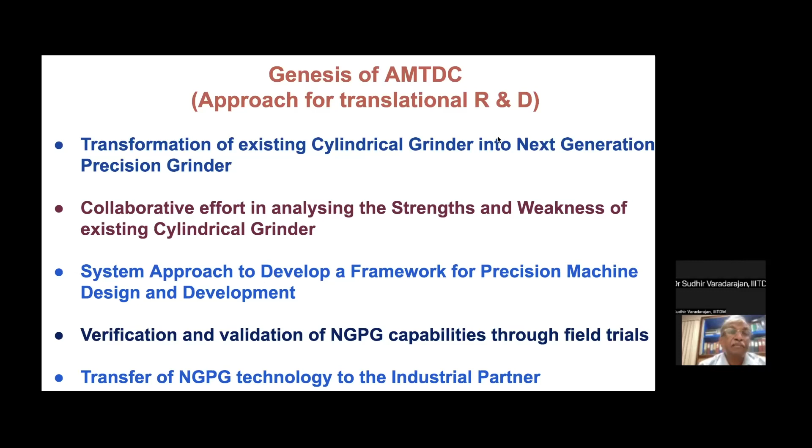We wanted to make this machine on par with the machines being imported by many industries, and here I used the collaborative effort. The first thing was that we felt we needed to understand the strengths and weaknesses of our Indian machine tool manufacturers, and then we used the system approach.

Many people from outside, from Saint-Gobain and other places, used to advise me on how I should develop this framework, and that's where we used the system approach. We also built the system with the help of industry and validated it with real-time activities which happen in the industry.

There were several collaborators who supported me in providing the tooling, fixtures and components. After validating it for almost a year and a half, we transferred this technology.

I think this is the basis for me to get into the Center of Excellence on Machine Tools and Production Technology.

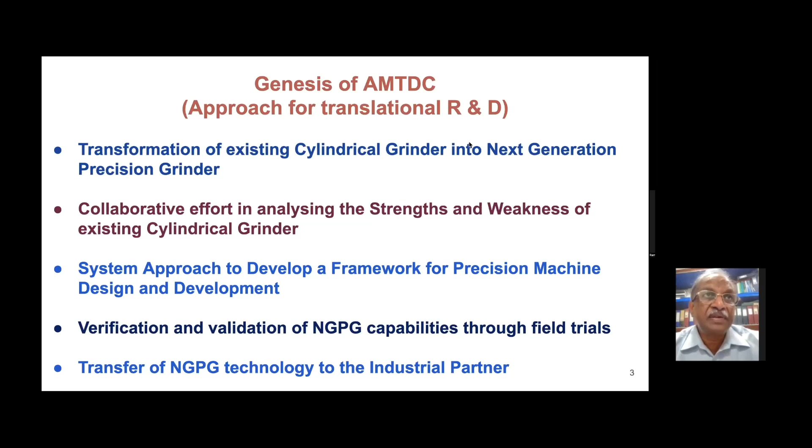I'll spend some time here, but later on I can quickly run through some of them to show how we used to get these projects from industry as well as government support.

When this project was sanctioned by the Principal Scientific Advisor's Office, it was pre-competitive R&D. They were not expecting much, but they wanted to focus on enhancing the capabilities of the Indian machine tool sector.

That's when we approached industry like Micromatic Grinding, then we went to associations like the Indian Machine Tool Manufacturers Association. Through the manufacturer of the machine tools, we approached the end users of the machine tools like Delphi TVS, and then testing facilities available at CMTI in Bangalore, AMTTF.

And then a gentleman from Saint-Gobain Northborough, who was supplying grinding wheels and dressing tools etc. He graduated from MIT, and was the director of surface preparation technologies at Saint-Gobain Northborough. He also helped us in showcasing the system approach and building the entire framework.

I think the challenge for many machine tool industries in India is high productivity machines and high precision machines. That's when we felt we needed to make a survey of the machines being developed by Indian machine tool industries, identify the specifications for which we have to put our money, effort, and collaboration activities.

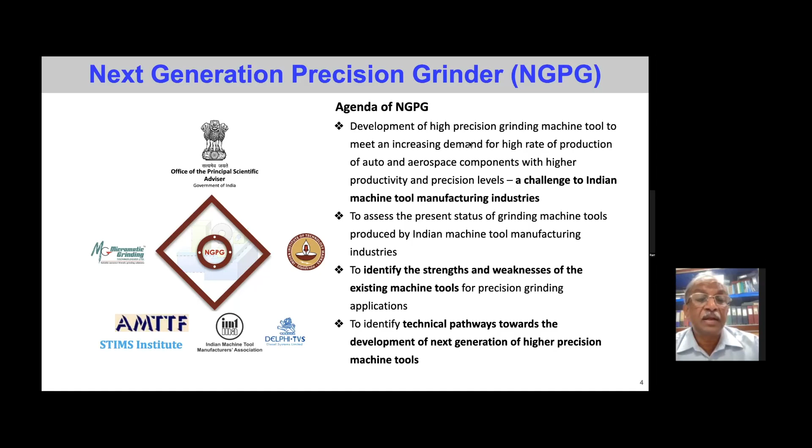That's where I'm just spending a couple of minutes on how this framework was developed. So first we went to end users like Delphi TVS and asked them, and many machine tool manufacturers using high precision grinders like textile and hydraulic component manufacturers. They all said that the tolerances and specifications of machines that we use are very high precision machines.

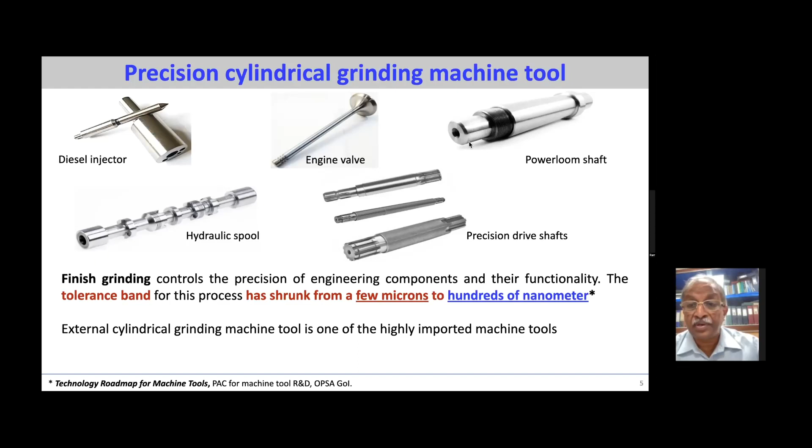There was a roadmap brought out by the Principal Scientific Advisor's Office in order to develop next generation machines in India, for which the government wanted to support through both collaboration efforts and funding. So when we surveyed the components, we found that Delphi TVS is using high precision grinders which are imported for making all the types of components shown in this diagram.

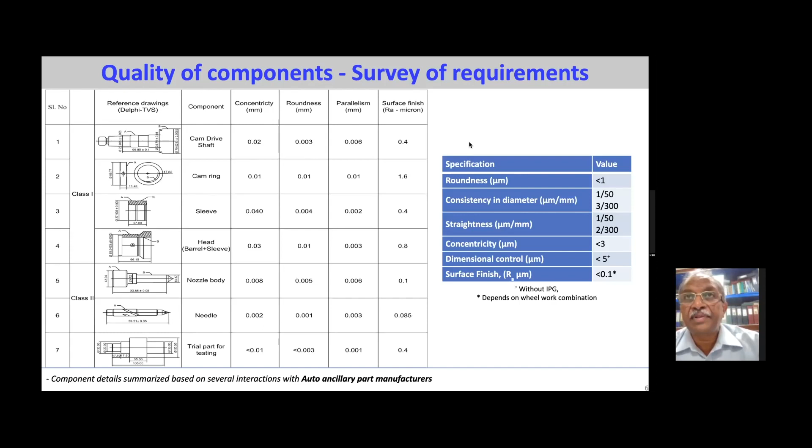We identified the features in terms of concentricity, roundness, parallelism, and finish, etc. We felt that a machine we wanted to develop should have certain specifications, and we should bring out that machine so we can compete with the outside machines being imported. This is all without any gauging, without sensors and adaptive control. That is what we identified.

We formed teams from both sides, ranging from top executives and top-level management to mid-level and lower-level management. All of them understood why we were developing it. Myself and a couple of engineers recruited for the project, along with young students, all worked together. About 20 people worked from our side and about 20 from the other side. There were several reviewers who constantly reviewed this project at a frequency of about 3 months.

Then we brought out this framework following systems thinking and a systems approach, wherein the overall system's performance can be enhanced only when we look at all of them. So that is where we looked at the machine process and the interaction of the tool with the workpiece.

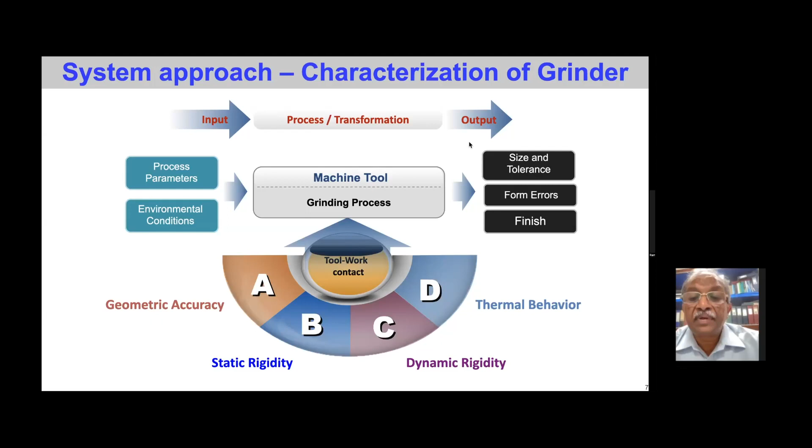We formulated several models through data collected from the machine and also by benchmarking it with the imported machine, identifying weaknesses and stating that these weaknesses have to be removed if you want to make the machine better. You can see the entire engineering concepts, from geometric measurements, kinematic measurements, volumetric accuracy, to looking at the static and dynamic aspects of the machine in terms of its rigidity and performance. Of course, the thermal behavior of the machine is also important if you want to realize precision grinding with these machines.

It took almost 2-3 years for us to bring out this framework and then file a patent. At the same time, the industry also understood where they had to put in their efforts to make changes and modifications in various units.

We also identified the errors that arise due to certain aspects, and most of these errors are due to thermal errors. We did some experimentation and also proved that if you correct these errors, the machine is likely to become a precision machine.

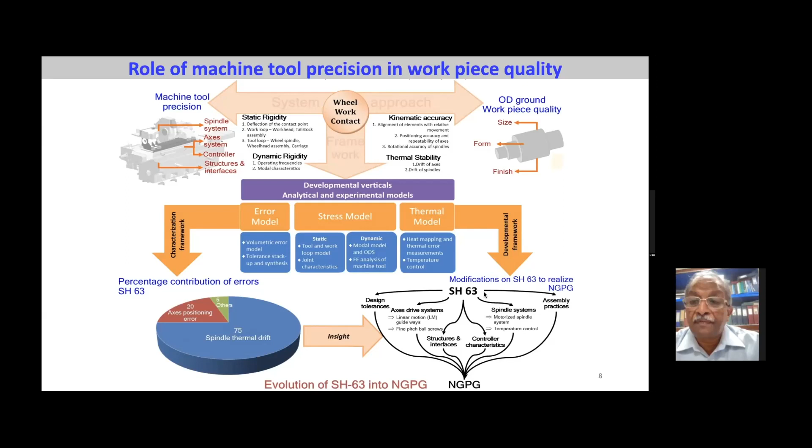So what we took was a machine with some specifications, the SH63, having much lower precision levels, and by changing the design, assigning tolerances, changing some of the drive systems, and carrying out corrections on the drive systems and spindle cooling, etc., we were able to bring out this machine with the support of the industry, and we named it the next generation precision grinder.

This was inaugurated by Dr. Chidambaram, because the office of PSA was supporting this under pre-competitive R&D, and it was installed at IIT Madras in June. But then the story did not end with this.

Now it has begun. Like they said, who will buy this machine? How do you sell this machine? Unless you prove it to the customers, they are not going to believe that this machine is going to give the precision levels that you are projecting.

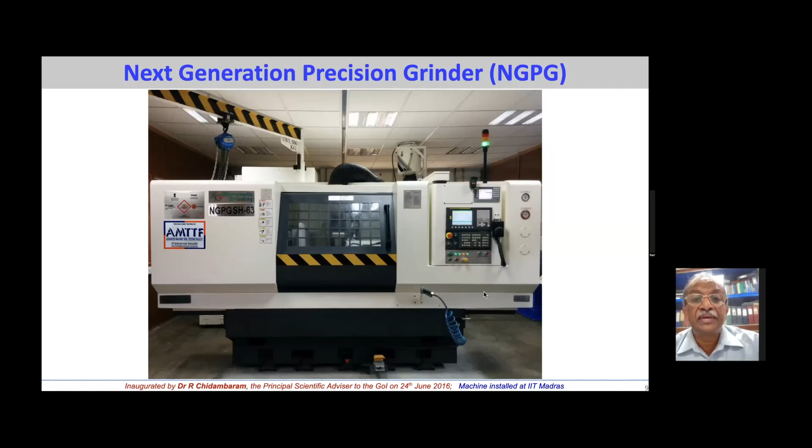So then we approached different companies like Bosch, Delphi TVS, Danfoss, and asked them to please provide us the tooling and also the workpieces so that we could machine them - not just one or two, but hundreds and thousands. Finally we brought out this entire capability chart, and that's when they believed it, and then we transferred the technology.

So what I'm showcasing is an example of how the capabilities of a machine tool industry producing machines at a lower precision has been taken to the next level. I think this company is still with us, supporting many activities and taking up many other projects with funding from both the government and their own contributions.

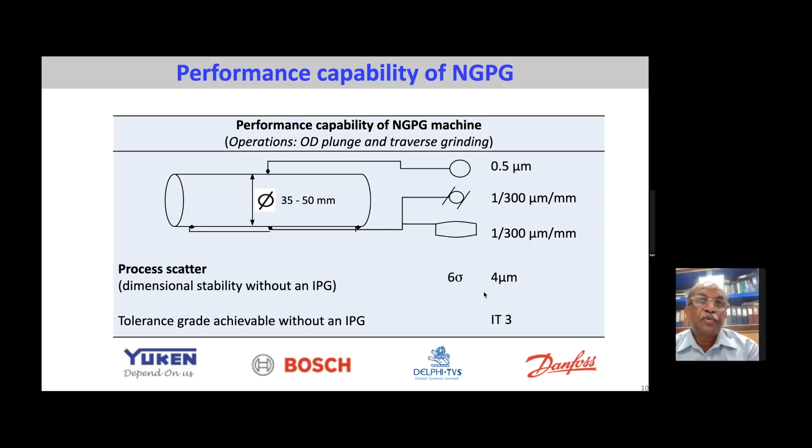During this time, the PSA's office, Ministry of Heavy Industries and many other ministries formulated a policy, and that policy is approved as the Capital Goods Scheme. This is basically to enhance the competitiveness of the capital goods sector.

In phase one, they said we will support different activities ranging from technology development, skill development, Samarth Udyog, and facilities, etc. But at IIT Madras, we consciously decided that we will not get into the other activities such as facility centers, Samarth Udyog, and testing and certification centers. We have stayed focused on technology development.

We also wanted to build an innovation platform to connect people, mostly a digital platform. We also offer a lot of internships for students from different colleges, not only from IITs and NITs. And we take the technologies developed here to the next level through partnership mode, which we call an industry accelerator.

So what I'm going to show you in the next 15 minutes is a snapshot of how we have gone about taking up projects, from many industries, north, south, anywhere, you can see.

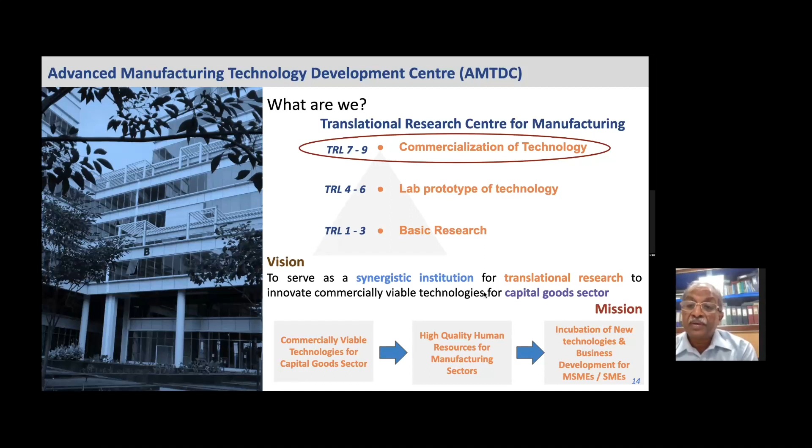Many of them, if enthusiastic and interested, we also encourage them to incubate their ideas with a small amount of money. And then they also go to the next level of a startup, and some of them are growing in other areas of manufacturing.

So overall, this center doesn't work on one or two technologies. Manufacturing basically covers many areas. First we started with only the machine tools and various technologies needed to make machines better, either high precision, high speed, or highly reliable machines.

We have worked to build several robots and also create automation solutions for MSMEs. And the last but not least is digital and smart manufacturing, wherein MSMEs can move from one level of automation to the next, where digital transformation and digital manufacturing is one of the key areas they should clearly understand.

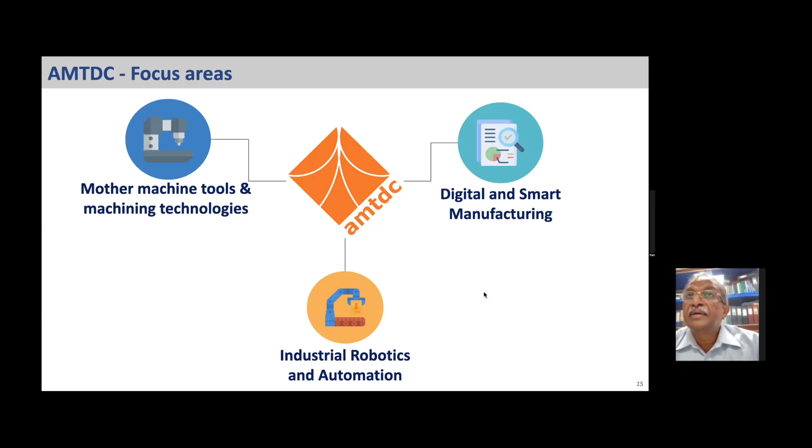Then only they can move from automation level 3 to automation level 4, where smart manufacturing can really create a change in the entire system.

As I said earlier, I explained how we approach the problem. We go to industry based on their interests and support, both technological and financial support are needed, and they commit. Then we identify the technologies which can be proposed as future or important technologies for each industry. You can see these technologies as prototypes and then finally as machines, sold by each company not only in India but outside the country too. Some have tie-ups with other countries, but when they get this transfer of technology, there are gaps they could not solve, and that's where our center and team help them.

These are projects ranging from simple cut-off machines to prepare metallurgical specimens, where efficiency and quality of cut are important. That's how we got into orbital cut-off machines, direct drive machines, and automating the entire line for grinding, polishing, etc. The other one I showed is the high precision cylindrical grinder.

We are using it to collect data and diagnose the entire machine tool, then create an automated system for arriving at cycles, automated dressing, and downtime monitoring, all on the same machine.

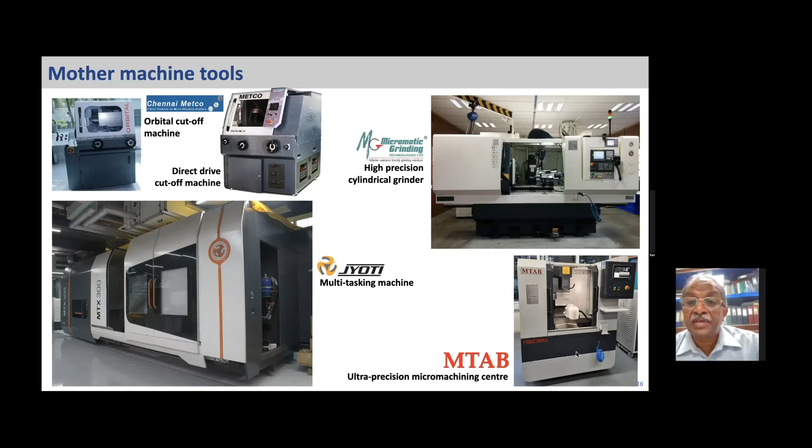Similarly, there are certain technologies that are completely denied, and we have to take them as a package and use them. These are some innovative ways of solving the problem. We looked at patents, including expired patents, studied all of them, and came up with several designs. We created test rigs, implemented them, and tested them with a third party.

These are some of the units that go into hydrostatic systems, which can be used in most high precision machines for grinding or positioning. These are patented, not only Indian patents but also outside patents we filed, and some were already approved.

Using this capability set, we have also expanded our domain with expertise in different areas like manufacturing processes, water jet technology, and suspension jet technology, and we supplied these to different defense industries.

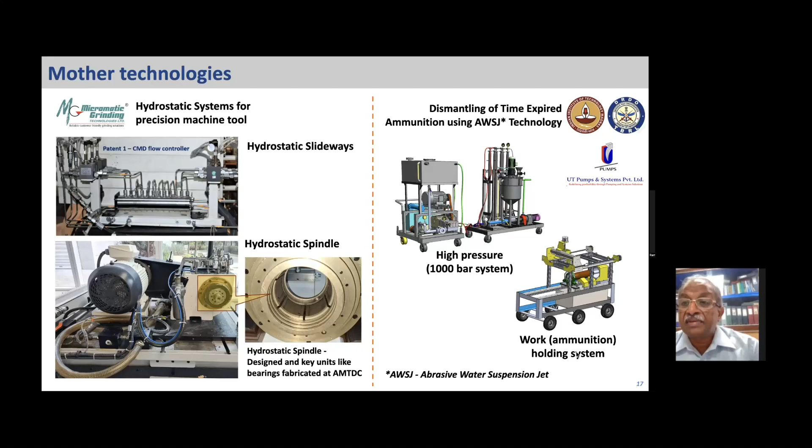So those are the ones we focus mostly on — core technologies or mother technologies — some for MSMEs and some for high-end industries where technology denial existed.

We then used these precision machines more effectively by developing frameworks and tools like a diagnostic system. We developed it first, then created the framework to automatically suggest grinding cycles, dressing periodicity, and monitor machine usage, incorporating a minimum number of sensors effective for automating the process intelligence. This is again being used by industry.

In many industries, they have their own grinders and are supplying them, and we are trying to get into the next level of edge computing and cloud computing with all of them.

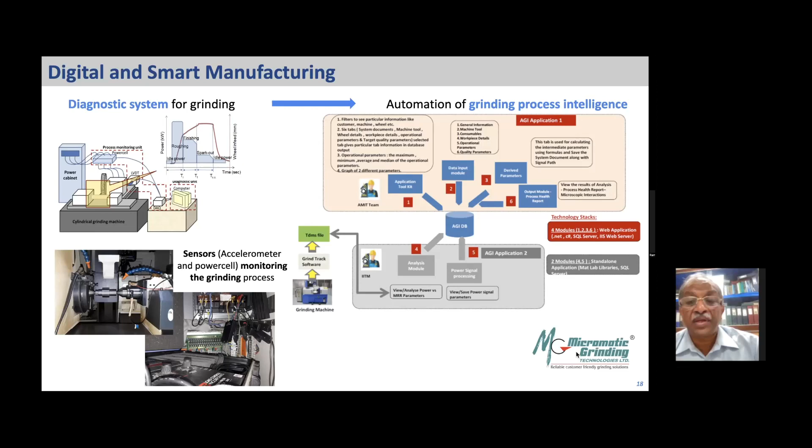This is another interesting project. The machines manufactured by our Indian industries are all at a low precision level, so when they're supplied to different users, due to temperature, ambient and other conditions, there is a drift in the tool from the programmed position. That results in an error, which goes up to 60 microns at some locations when these machines were installed.

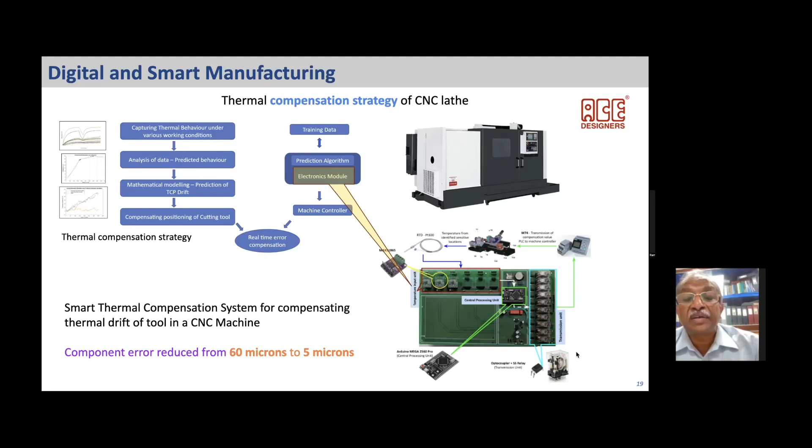I think we have developed the entire framework right from the industrial IoT, and then we also built the controller which can provide this compensation data. This is where we are expanding beyond 2 axis to 3 axis, and 3 axis to 5 axis, with many industries now.

So the automation and robotics cover simple drives we don't manufacture. Even though we do manufacture them, they're not on par with standard controllers and drives. So we took the help of a few faculty from electrical engineering, built them, and gave them to many industries who can test them on simple machines, which can be used as a test bed for research and other studies.

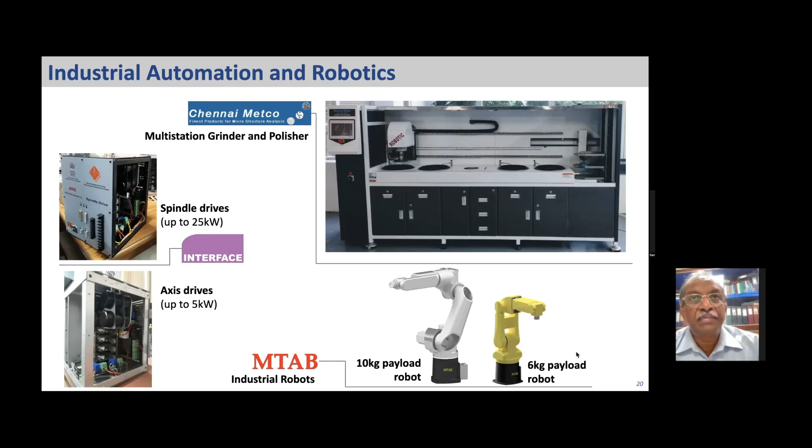Now we are accelerating it by reversing it. We have identified the industries who can manufacture these drives, motors and controllers, so that the import content will become only 30 to 35%.

With all these capabilities, many companies have approached us during COVID, just before COVID, because we have to sustain our activities. For sustaining, unless we get funding from industry and government, we can't sustain. So we felt these capabilities can be offered to many of them as turnkey projects.

We took a couple of them, and those are the ones I'm going to show in the next couple of slides. For the entire system design, they give us the specifications, and then we build each unit, taking existing units from the factory and putting them together to build it.

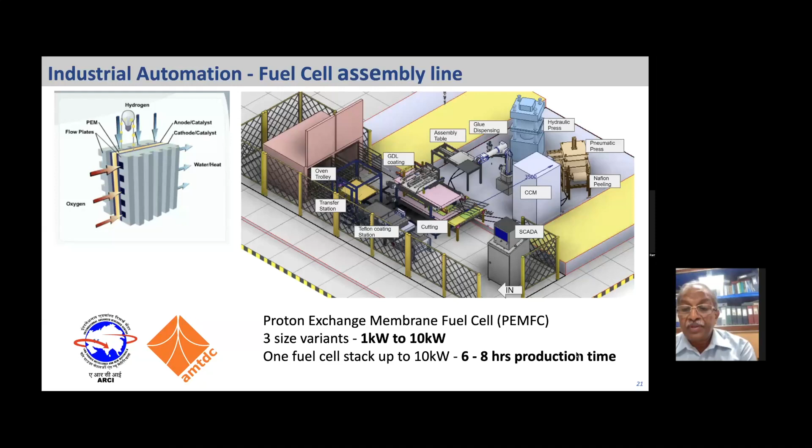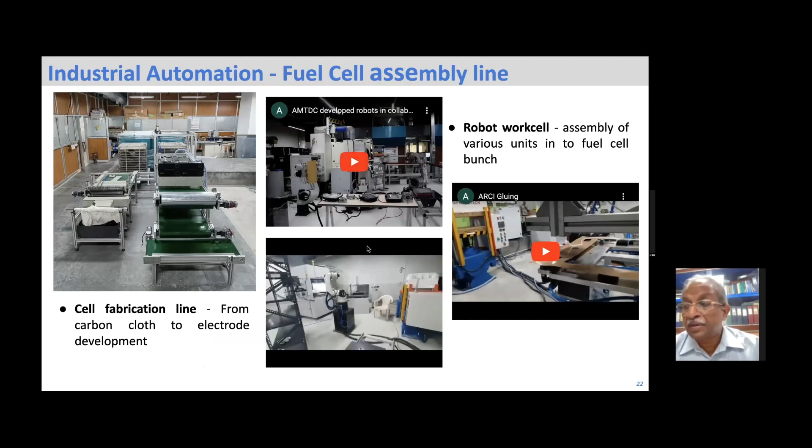That's where you can see the actual models and their actual configuration. We started building these robots for handling materials and for assembly, etc. I think this is where you can see many of them in this particular slide. You can even visit our website and get many of them - some are showcased with videos also.

With so many things happening, the government felt that you need some sort of platform on which you can connect people, and this platform should be a little more flexible and open, like other platforms we witness every day, like Google, LinkedIn or Facebook, etc.

We took the help of a few faculty from our computer science and metallurgy departments, who have expertise in using knowledge graphs to build such platforms. Even TCS was kind enough to give knowledge support with their engineers and heads.

We have made this platform with several features. The main purpose of this platform is to connect people, integrate knowledge, and help students connect to professors, engineers to managers, and anyone who would like to use it as a platform on manufacturing-related issues.

This platform, we call it mykite.in. Those of you who want to see this can just click onto it and get more information about its various features. We have launched it very recently after completing the entire platform with the GraphDB approaches.

And then we wanted to use this platform to create more talent, for which the government and the industries were supporting us in terms of offering some internship and stipend for the students. We started in 2021 August, and we did it online. We also trained about 350 students on this platform, which is built by AMTDC with some support from outside.

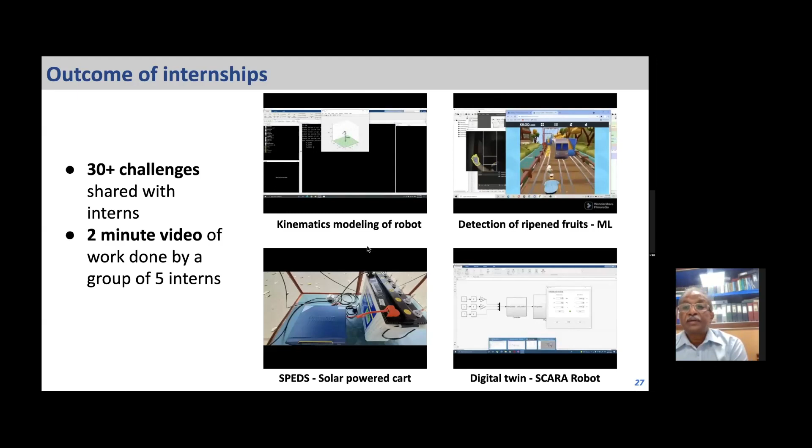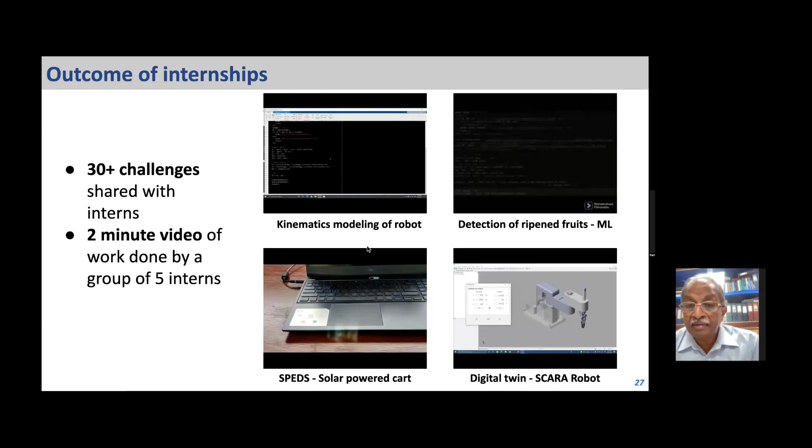I think some of these projects are also taken to the next level as incubation and then startup level, by seeking funding from independent entrepreneurs or supporters from major industries. We have made some of them and showcased them in the center, as well as getting support from them.

So now we are accelerating it to encourage more and more young people to come and interact with our engineers, and also collaborate with many others located in different parts of this country. We have signed MOUs not only with these industries for whom we are developing technologies, but also many from outside the country, from different countries like Canada, USA, and even Philippines and Singapore.

On one side we have partners for technology development. They support us in some way to take these engineers and ask them to work on specific issues that are bothering them in improving their machines and capabilities. On the other side, some mentors and supporters engage their own engineers and students to build talent among them.

So then we used to invite some experts from anywhere in the country, with our own local reach and also outside reach, and they address these interns online through this platform, spending about 45 minutes to 1 hour, like as I'm doing right now. So then we offer some specialized courses instead of routine courses, so that industry as well as academia can benefit. These experts are drawn from different institutions and various parts of the globe, and then we help them.

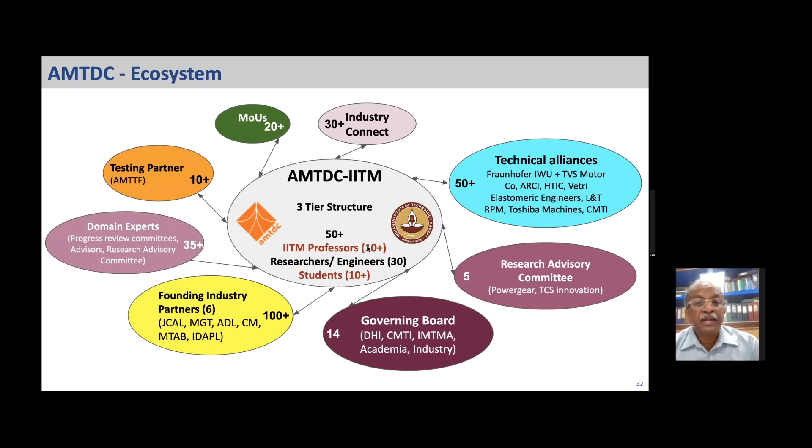And this has resulted into a center, which is a virtual center.

Since we have been working on several areas like digital manufacturing and smart manufacturing, and many others, and they have seen the entire environment and ecosystem, they felt let us have collaborations with some agencies like MESA International on one side and APAC on the other. One is in Americas and the other is the Asia Pacific region. The Cantier CEO is the lead person on the APAC side, and MESA International is somebody from Canada.

So this is where we have brought out the center with the aim of assessing the capabilities of many MSMEs, educating them and training them on specific tasks so they can transform their center or MSME into the next level of automation. This is where the MES and smart manufacturing solutions will be provided either by us or by other groups who are part of this ecosystem as members of the special interest group.

So this is how we formulated and then inaugurated it with the chairman of Tata Sons, along with our chairman Dr. Pawan Goenka, and Director Professor Kamakoti, in 2022.

So here we would like to make the center, though virtual, a center for making solutions easier and building solutions which are cost effective. The center, where we have all these facilities in the research park, will also serve as an experience center to give them an idea about how you can translate your machine into a smart machine or a better machine, etc. If they require some support, we are willing to extend our arm and support them.

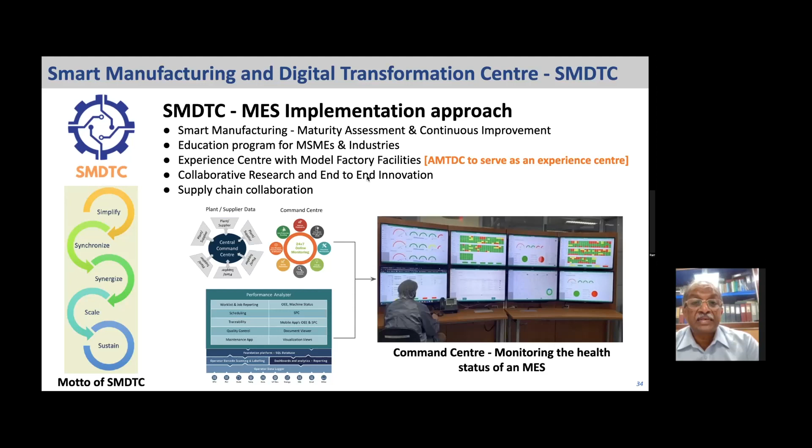I think we give these projects to young students, either at the bachelor's level or postgraduate level, and ask them to understand how the data can be retrieved from the controller, how you can access them, what type of protocols, what type of algorithms, and data analytics — all these things can be easily explained to them. And if they are enthused and motivated, we'll also ask them to work on these projects for a period of 6 months to 1 year.

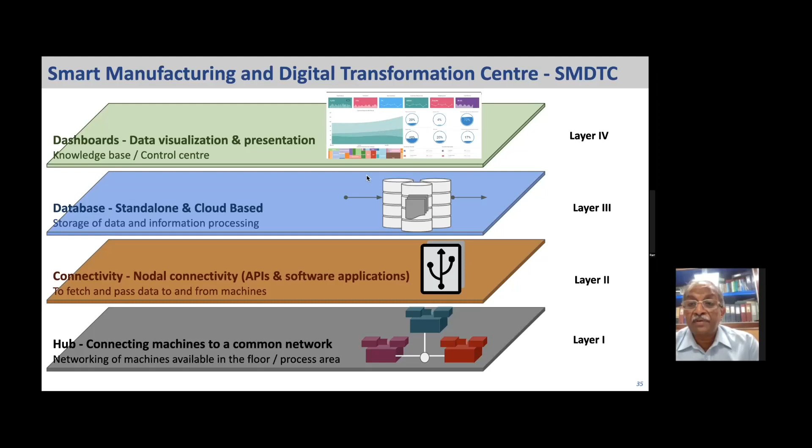I think this is how we have extended our arm to many other areas like smart manufacturing and the Center of Excellence on smart manufacturing. I think this is the one.

The third one, which I mentioned, is how we are making an impact on startups and faculty members who are inventing new processes and new methods. Many of them develop a process on the tabletop but don't know how to take it to a level of a reliable system with which they can conduct a series of experiments, collect the data, and publish it. And if these systems become reliable enough to make it as a startup, etc., we will also encourage them.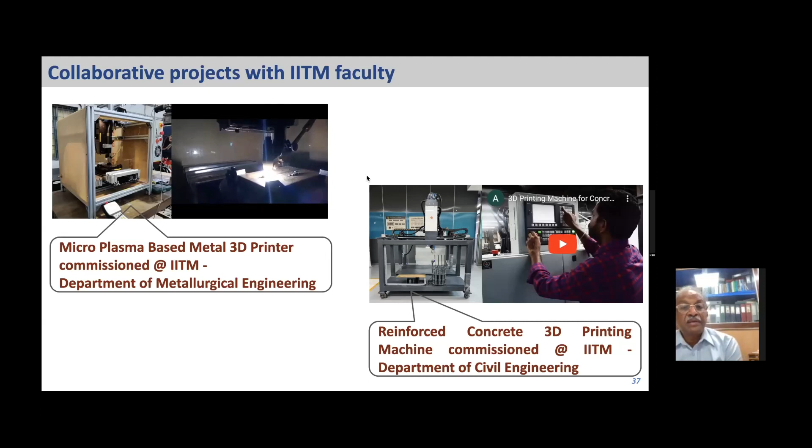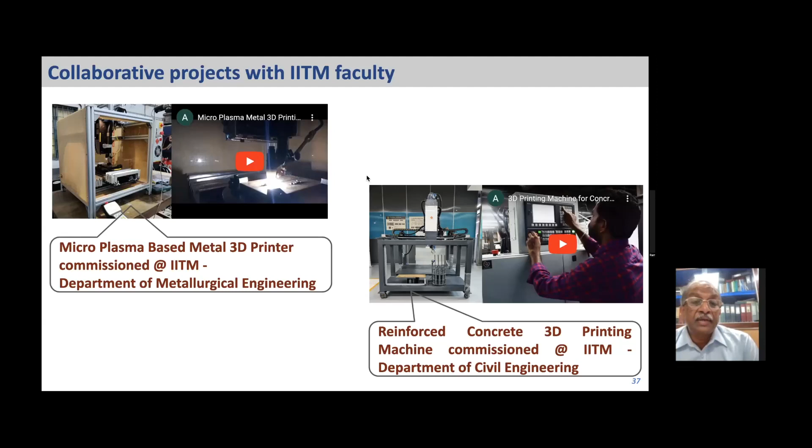So this is where you can see metallurgical professors and civil engineering professors working on 3D printing have approached us, and we did this and gave it to their students to carry out their research work. Many of them from SMEs, MSMEs, and OEMs also approach us, and some of them go to Fraunhofer and other agencies outside the country.

And when they approach these agencies, due to costs and various other constraints, they also approach AMTDC and IITM, and that's where we become partners in this entire collaborative effort by signing NDAs with each of them and offering the solutions to the extent that we can offer.

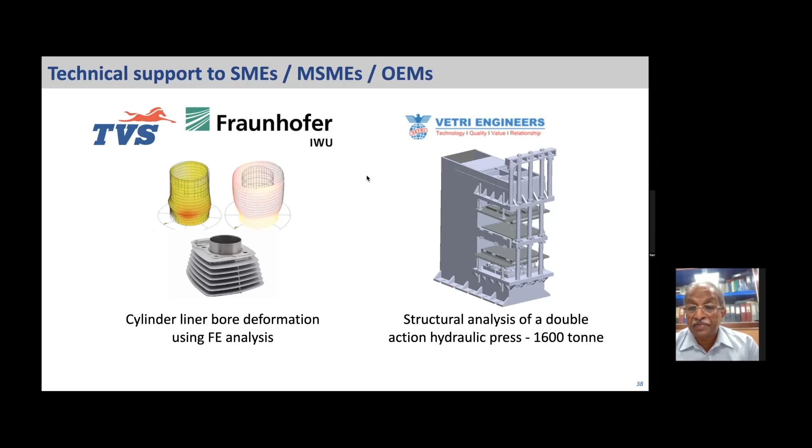Then, of course, small and medium industries come up with some problems. I think these all appear to be very routine, but this is the type of support that most industries require. Most of them don't open up initially — we have to go and tell them that this is the capability that we have. And in some cases, we even bring out the designs which will help them build their systems with their own supply chain and ecosystem, etc.

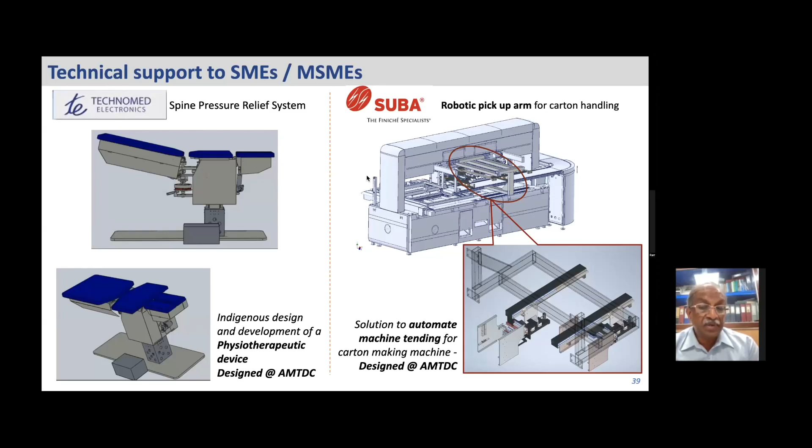I think we just build them, design them, or provide the solution end to end. A range of them can be seen through a set of examples here, like areca leaf based tableware.

They were producing it with dies and molds designed by amateurs, like from job shops. When we analyzed, we found deficiencies which we could correct, and we provided a new set of tools, reconfigurable or replaceable tooling, etc.

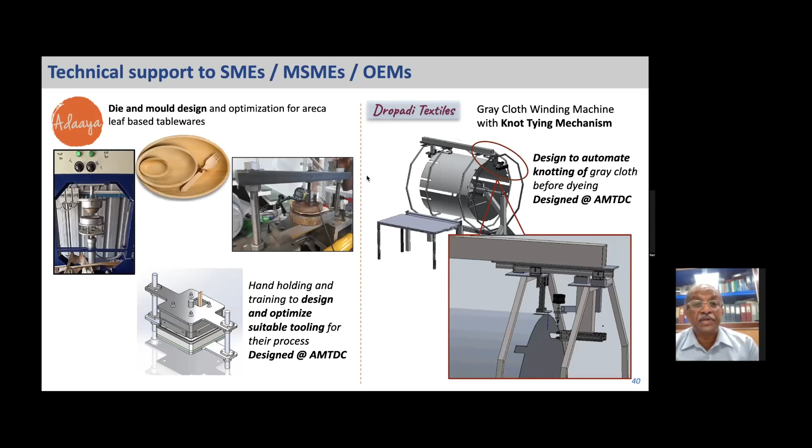The same thing happened with the textile industry in Surat, and we gave them a solution which they said they will get implemented. Many startups in our entire ecosystem at IITM Research Park, located next to IIT Madras, approach us in their initial phases, and we give them a solution or manufacture it for them, and they in turn expand their activities.

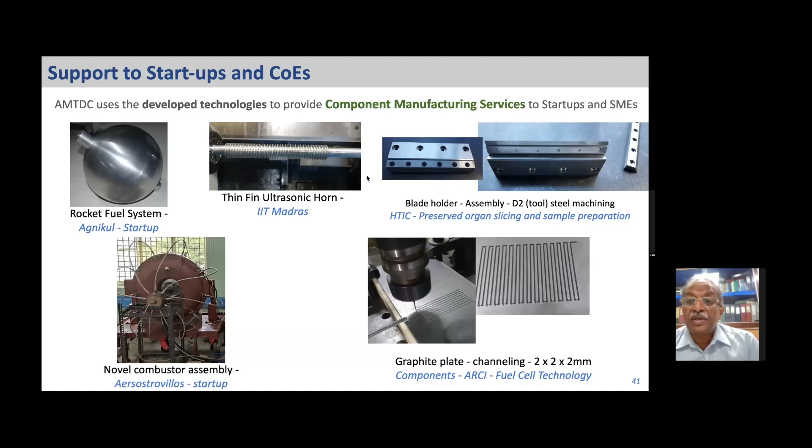That is how the entire AMTDC ecosystem is supporting many startups and incubators, etc. And of course, the story continues.

Phase one was over, and then phase two was launched by the government in 2020-21, with almost 4 times the money that was initially allocated for phase one projects. We have been lucky enough to get these technology development projects.

We have expanded our clientele from the previous 6 partners to 4 more partners. Whatever technologies we developed in phase 1, we would like to put them on the machine and make these machines into high precision machines.

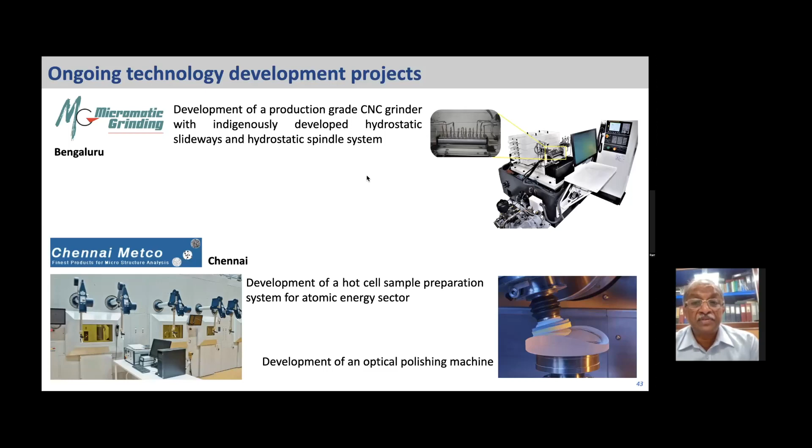These are all user approaches — the industry solves some of them, but where they're not able to solve it, they come to us and we project it as a project.

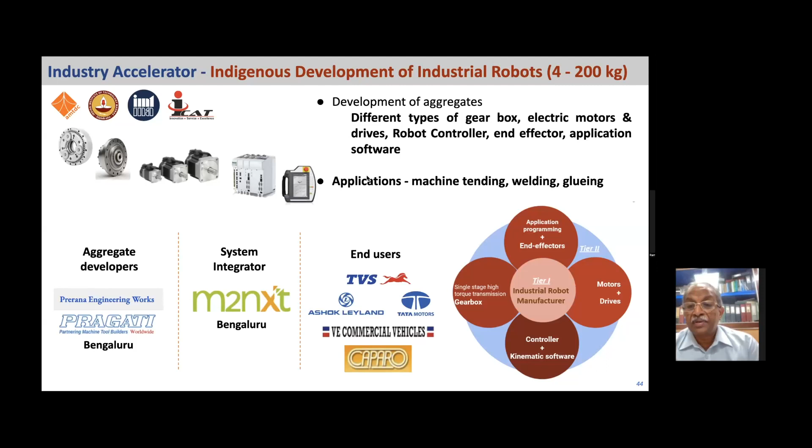After these systems are made and integrated, we launch them to test their reliability with the support of end users, who are all the auto tier 1 suppliers or the OEMs, etc.

So this is where the story goes on, but I have many more things to share. Since you have given us about 45 minutes, I felt I need to showcase some of them.

I think our reach extends to almost all the associations, and many of them have supported us in building this entire ecosystem. Without their support, we would not have really gone further.

We are also promoting through our media partners, Pro Manufacturing, which is again the Birla Group company. And this is what I wanted to share today.

There are several advisors from outside the country and inside the country, from IITs and industries, etc.

I just would like to acknowledge our team — the technical as well as engineering team — which is working to solve all these problems.

Many engineers from the industry also approach us, and they can spend their time at the center for many days, unlike the IIT labs where they have very little space and time to spend.

So this is, in a nutshell, our ecosystem, and we are located in the research park. You are most welcome to visit if you are around, or whenever you are around.

I would like to invite you, and if you give me advance information, we can also explain the various activities and give a demo of the technologies we have developed.